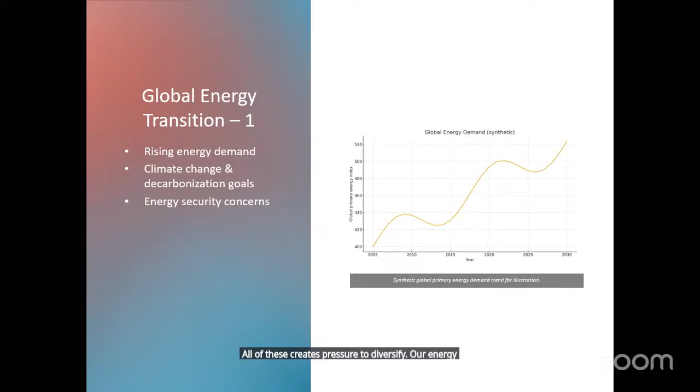Governments have set ambitious targets. Many countries have pledged to achieve net zero emissions by 2050 or later. But achieving those commitments requires not just deploying renewables, but also ensuring that they work reliably together in the energy mix. This is where bioenergy is special. It is renewable, but unlike solar or wind, it is dispatchable. That means it can provide energy whenever needed, making it a stabilizing force in the grid.

So in the global energy transition, looking ahead, we need an energy system that is resilient, sustainable, and flexible. And bioenergy contributes to that because it's renewable and storable. It can complement variable renewables like solar and wind.

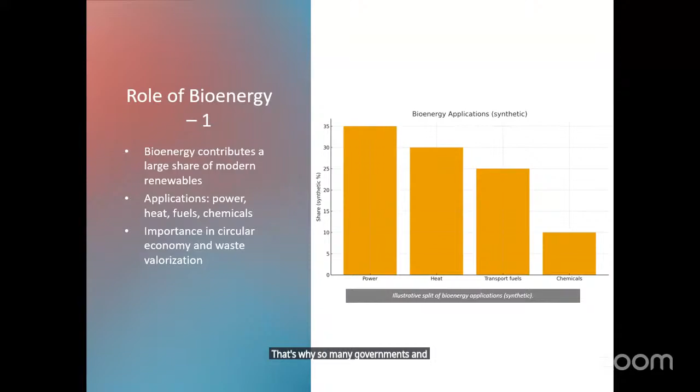And the role of bioenergy, looking to the future: bioenergy holds even greater potential, and sustainable biomass use can support rural economies by creating new markets for residues and byproducts. It can also enable decentralized energy systems, for example, small biogas plants that serve a community or a farm. This kind of distributed energy generation increases resilience, especially in areas not well connected to the grid.

But to unlock this potential, we need smarter ways of managing variability and uncertainty. This is exactly where digital twins come in, to help operations optimize and predict outcomes.

So why does virtualization matter? Why do you need virtualization for bioenergy? The answer lies in complexity. Biomass is not like coal or natural gas. It is highly variable. Its moisture content, composition, and energy density change depending on where it comes from and how it is stored, depending on geographical area and weather conditions. All these things affect the biomass.

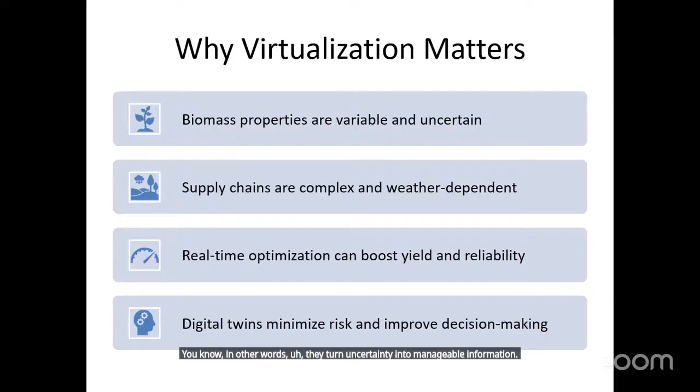So what is a digital twin? We start by defining what a digital twin actually is. At its core, a digital twin is a digital replica of a physical system. It's not just a static model, it is a dynamic system that continuously updates with data from the real world. Think of it this way: in the past, we built simulation models that could predict how a boiler or digester behaves under certain conditions. But those models quickly became outdated because they did not account for real-time changes. A digital twin solves that problem by integrating real-time data streams with simulation.

So in bioenergy, a digital twin of a biogas plant might continuously receive data about feedstock composition, digester temperature, or gas output. This allows operators to not only monitor but also predict future performance.

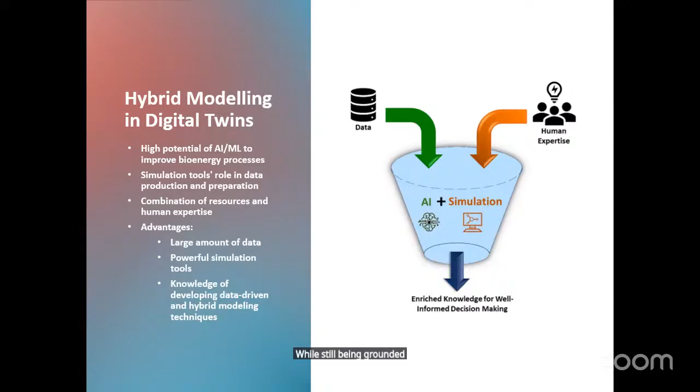So now, how do hybrid models support bioenergy systems? First, they can handle feedstock variability. Imagine receiving a batch of biomass with higher than expected moisture content. Physics models might predict the drying requirements, while machine learning models can forecast how that will affect energy yield. Secondly, hybrid models improve real-time optimization. By combining sensor data with simulations, they allow operators to make decisions that are both accurate and fast.

Finally, they enhance predictive control. That means not just reacting to issues, but anticipating them. Whether it is a risk of digester instability or a boiler efficiency drop, this predictive capability is what makes digital twins powerful tools for bioenergy plants or systems.

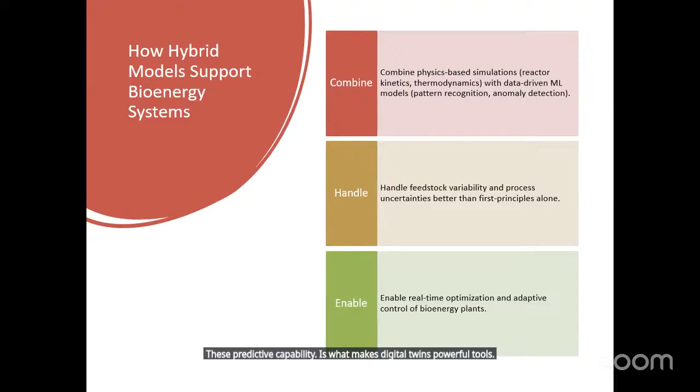So, the use of digital twins across industries. Digital twins are not a new idea. They have been applied in several industries with great success. In aerospace, for example, every modern jet engine has a digital twin that monitors its health and predicts maintenance needs. In healthcare also, digital twins are being developed for patients; using data from wearables, doctors can simulate and personalize treatment.

In manufacturing, factories use digital twins to optimize throughput and reduce downtime. The takeaway here is that the concept is proven; we are not reinventing the wheel, but rather adapting a powerful idea to the specific challenges of bioenergy.

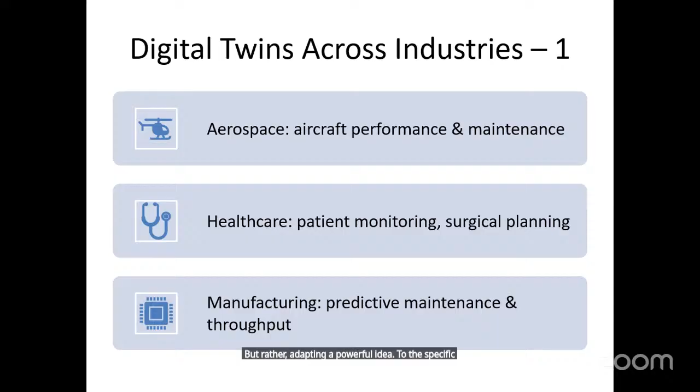So, digital twins across industries too. In this slide, in the energy sector, we already see digital twins being used in wind turbines and electrical grids. For example, wind farms use digital twins to predict turbine failures before they happen, reducing downtime. Utilities use them to simulate grid behavior under different loads. These applications show that digital twins are versatile and scalable.

If they can handle something as complex as a national power grid, then they can also be applied to bioenergy plants and supply chains. The lesson is that bioenergy can leverage existing experience while tailoring solutions to its unique challenges.

So, relevance to energy systems. Why are digital twins particularly relevant to energy systems? Because energy systems are dynamic and interconnected. You have fluctuating supply, variable demand, and a need for high reliability. Digital twins allow us to model that complexity and make smarter decisions.

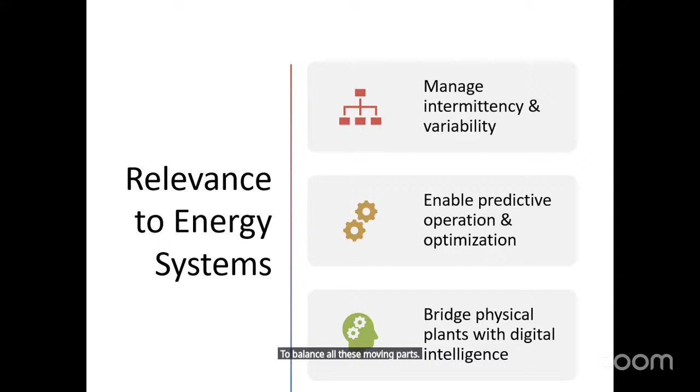For bioenergy, this relevance is even greater. Feedstock supply is variable, conversion processes are sensitive, and integration with the grid requires precise forecasting. Digital twins provide the predictive capability to balance all these moving parts. In short, they make bioenergy more competitive and more compatible with other renewables.

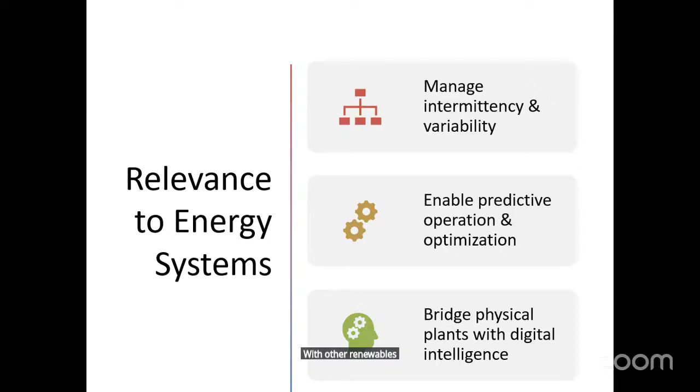So now we need to know about the different types of biomass feedstocks. Looking at bioenergy systems themselves, starting with feedstocks, agricultural residues are one of the most common sources. This includes rice husk, wheat straw, corn stover, and sugarcane bagasse. These residues are often underutilized, and in some regions they are burned in the open, causing air pollution. By diverting them into energy systems, we can turn a problem into a resource.

However, the challenge is variability. Moisture content can change depending on weather. Ash content varies with the soil type, and calorific value, which is an important parameter, differs by crop and harvest. This heterogeneity makes it difficult to design one-size-fits-all conversion systems. Again, this is why virtual models are so useful. They allow us to simulate different scenarios and adjust operation accordingly.

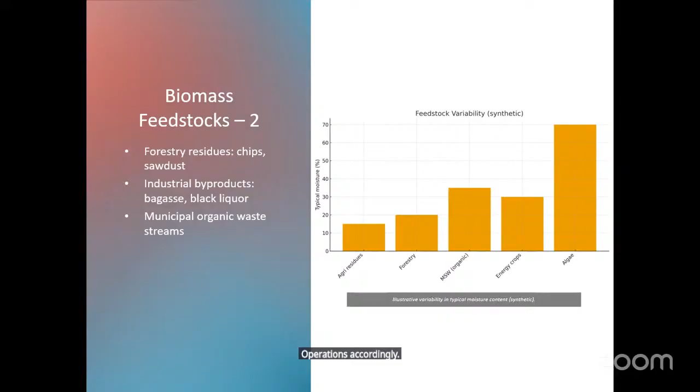The third biomass feedstock category includes emerging feedstocks like algae and aquatic biomass, which represent new frontiers. Algae, for example, grow rapidly, capture CO2 efficiently, and can be cultivated in non-arable land or wastewater, making them highly sustainable.

However, harvesting and processing algae is expensive and energy intensive. Similarly, other aquatic biomass sources show promise but come with logistical and technical hurdles. This emerging feedstock highlights why virtualization is so important.

We can use digital twins to simulate growth rates, harvesting schedules, and conversion efficiency before scaling up production. That reduces risk and accelerates the path from lab experiments to commercial viability. So whether we are talking about residues, byproducts, or algae, digital twins give us the flexibility to model diverse feedstocks and optimize how they are used.

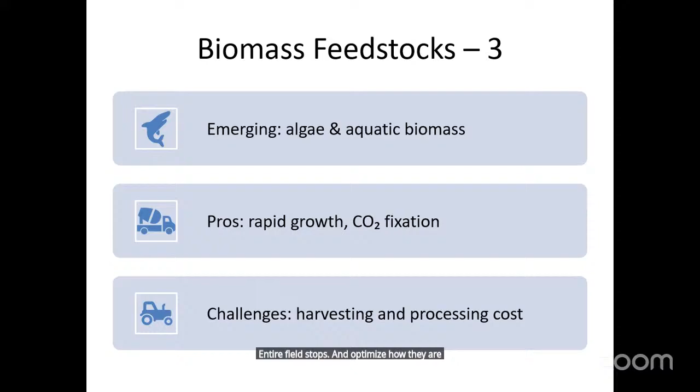Conversion pathway number one is thermochemical. Bioenergy conversion can be broadly divided into thermochemical and biochemical routes. Thermochemical pathways include processes like combustion, pyrolysis, and gasification. Combustion is the oldest and most straightforward, simply burning biomass for heat or power.

Pyrolysis, on the other hand, is a process where biomass is heated without oxygen, producing bio-oil, syngas, and char. Gasification uses a limited amount of oxygen or steam to convert biomass into syngas, which can then be used for power or fuels.

The advantage of thermochemical routes is their efficiency and scalability. You can build large plants that provide reliable outputs, but the downside is they often require high temperatures, significant infrastructure, and are sensitive to feedstock variability. This is where digital twins can really help by simulating these complex reactions and guiding operators in real time.

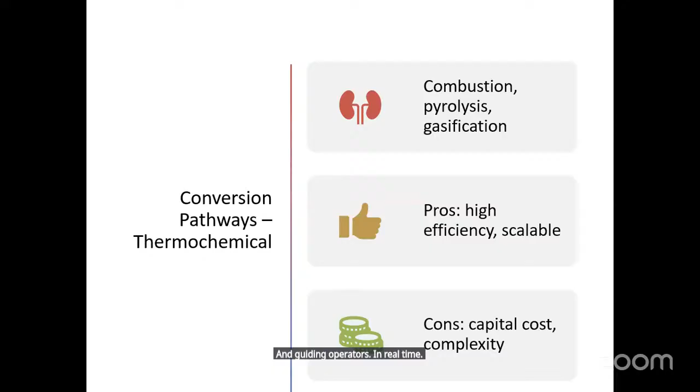Conversion pathway two is the biochemical process, the second major category. The most common methods here are anaerobic digestion and fermentation. Anaerobic digestion uses microorganisms to break down organic matter in the absence of oxygen, producing biogas, mainly methane and CO2.

Fermentation, meanwhile, is used to produce bioethanol from sugar and starch-rich crops. Biochemical processes are generally more environmentally friendly because they operate at lower temperatures and can use wet biomass without drying, but they are slower and more sensitive. For example, digester microbes can be easily stressed by changes in pH, temperature, or feedstock composition.

Here is where digital twins can be game changers. How? By monitoring microbial activity and simulating outcomes, they can help stabilize the process and improve yields.

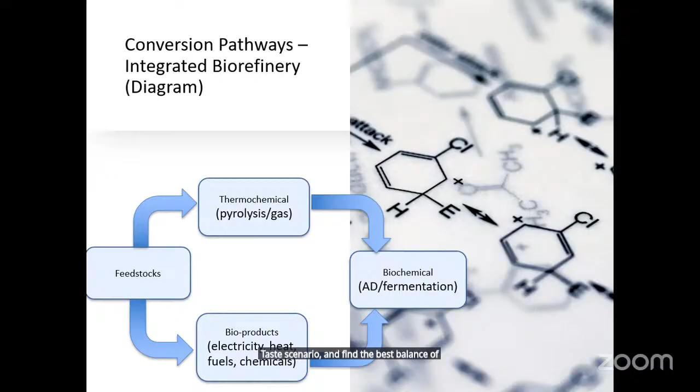What are the current challenges now? Despite the potential, bioenergy faces several challenges. First is feedstock variability: no two batches of biomass are exactly the same.

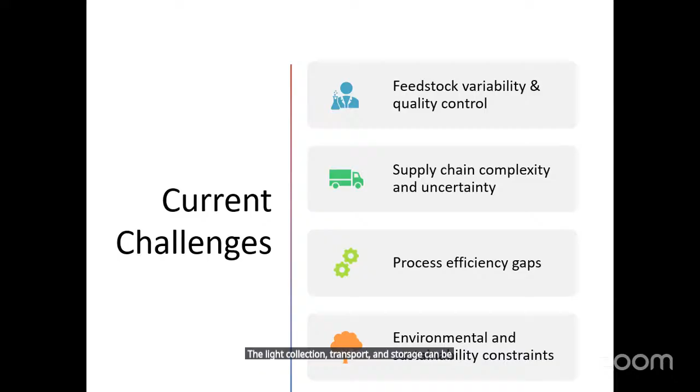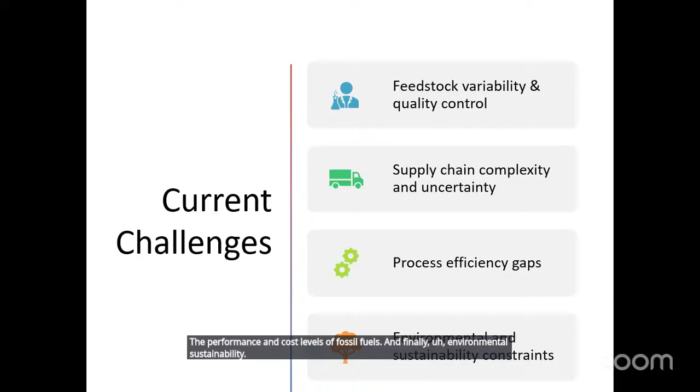Second is supply chain complexity, like collection, transport, and storage, which can be expensive and logistically difficult. Third is process efficiency; many technologies still struggle to reach the performance and cost levels of fossil fuels. And finally, environmental sustainability, not all biomass is automatically green. We need to ensure that land use, biodiversity, and carbon footprints are properly considered.

These challenges highlight why virtualization is not just a nice to have, but a necessity. It allows us to manage uncertainty, improve efficiency, and make bioenergy more sustainable.

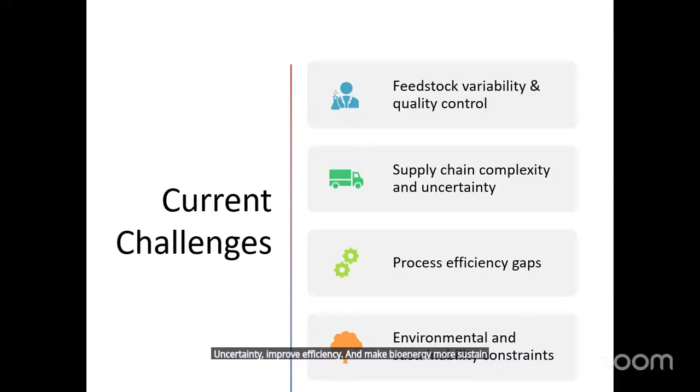So, why virtualizing biomass? First, monitoring biomass properties like moisture or ash content will fluctuate. Virtual models help us track those changes in real time.

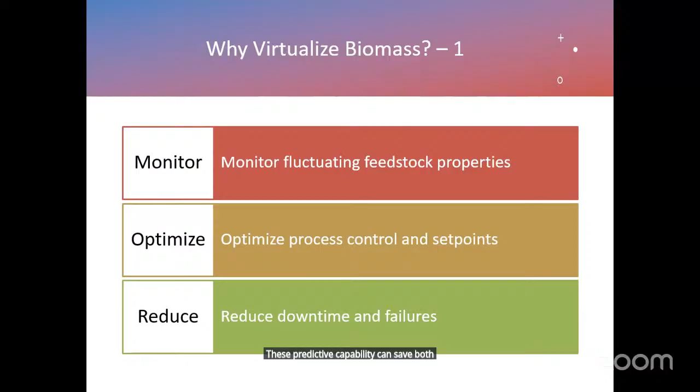Second, optimization. By simulating different operational strategies, we can identify the best set points for reactors or digesters, leading to higher efficiency. Third is reliability. Digital twins allow us to anticipate problems before they cause downtime. This predictive capability can save both time and money in industrial operations.

And now, why virtualizing the biomass? Another reason to virtualize is integration with the larger energy system. Bioenergy does not operate in isolation. It needs to interact with the grid, with markets, and with other renewables.

Digital twins make that integration possible. For instance, they can forecast how much energy a plant will produce tomorrow based on expected feedstock deliveries and current conditions. That forecast can then inform grid operators or market bids. So virtualization helps bioenergy move from being a stand-alone plant to being an active player in a smart, interconnected energy network.

So we need to know about digital twin architecture and how it works. You can see the architecture of the digital twin in bioenergy. On the left side, we have the physical asset, which may be reactors, boilers, digesters, and even the supply chain. These are equipped with sensors that capture data like temperature, gas flow, or feedstock moisture, and that data flows into an acquisition system, often through SCADA or IoT platforms.

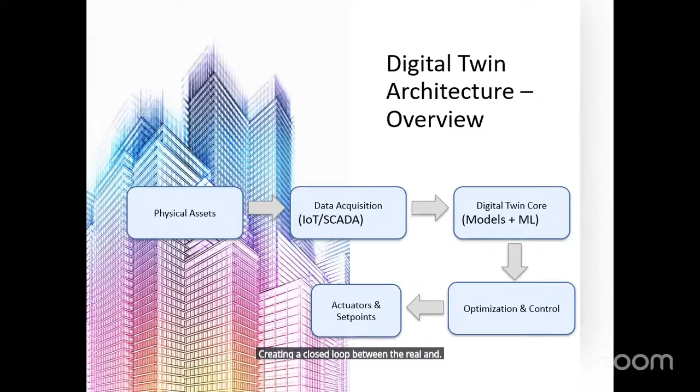In digital twin architecture, the data loop is the heart of the digital twin. The physical system sends data to the twin. Then the twin runs simulations and predictions, and sends recommendations back to the physical system. What makes this powerful is that it is not one way.

The twin continuously recalibrates itself based on new data, which keeps the model accurate over time. That's a big difference from traditional simulation, which often drifts away from reality as conditions change. This means a biogas plant can continuously learn and improve its operation as more data is collected. It's like having a living, learning model running alongside the plant.

In the case of digital twin architecture for people and process, we should also remember that digital twins are not just about technology. They are also about people and process. Operators need user-friendly dashboards to interpret insights. Maintenance teams need workflows that incorporate predictions from the digital twin. And management needs governance structures to ensure cyber security and data integrity.

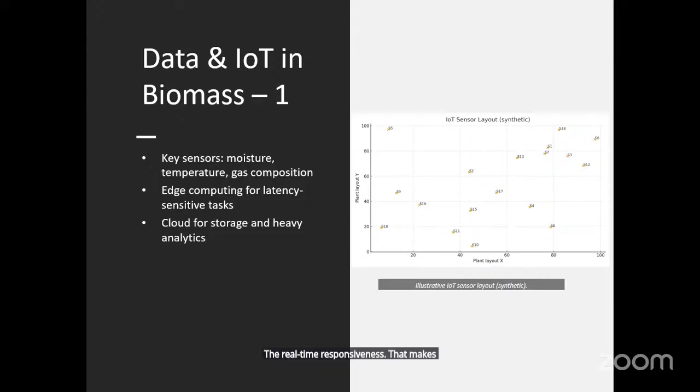Now, data and IoT in biomass - but just utilizing sensors is not enough. We also need to think about interoperability and data quality. If one sensor speaks a proprietary protocol and another uses an open standard, they might not talk to each other easily. That's why standardization is crucial.

Data also has to be validated and clean. Biomass systems often operate in dusty, wet, or corrosive environments, which can affect sensor reliability. If bad data enters the twin, the prediction will be wrong.

Finally, we must address cyber security. As plants become more connected, they also become more vulnerable to cyber attacks. So protecting data streams is essential, not just for plant safety, but for broader energy security.

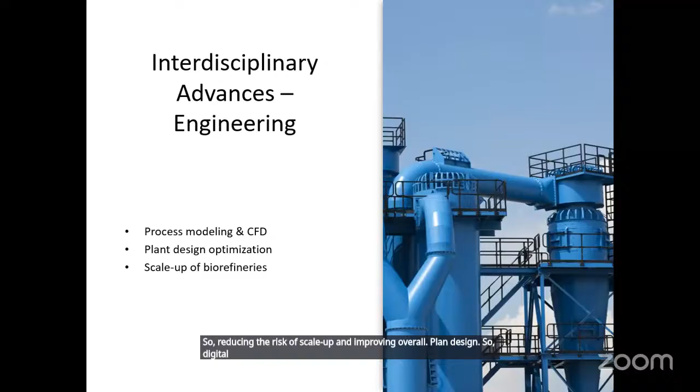Scaling up is another challenge. Designing a lab system is one thing, but making it work at industrial scale is much harder. So a digital twin acts as a bridge between lab results and industry reality, reducing the risk of scale-up and improving overall plant design. That's how a digital twin acts.

In the case of computer science, it contributes through artificial intelligence, machine learning, and IoT integration. These fields provide the algorithms and infrastructure that allow digital twins to process and learn from data. For instance, machine learning can predict reactor performance or detect anomalies before they become serious. IoT platforms handle the massive flow of sensor data, and data engineers ensure everything is stored, processed, and visualized properly. The challenge is making sure these systems are reliable, scalable, and secure. Bioenergy plants can generate gigabytes of data every day, and without robust computer science tools, it would be impossible to turn that data into actionable insights.

In the case of environmental science, that brings another critical perspective. We can't just optimize bioenergy for efficiency; we also need to ensure it is sustainable. Life cycle assessment, or LCA, allows us to evaluate environmental impacts across the whole value chain. Digital twins can integrate this LCA data in real time. For example, they can estimate the carbon footprint of producing a batch of biogas, considering both feedstock sourcing and conversion. This allows operators to make environmentally conscious decisions while still optimizing for performance.

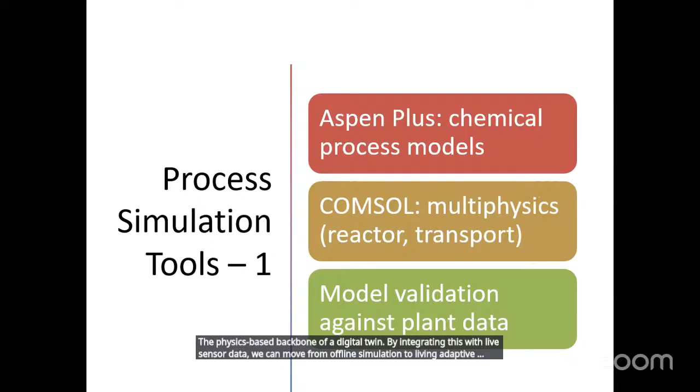Other process simulation tools include MATLAB or Simulink, which is excellent for control system design, and HOMER, which is widely used for simulating renewable energy systems and microgrids. These tools let us explore how bioenergy integrates with other renewables at the system level. Co-simulation is becoming increasingly important—that means linking different simulation environments together, for example coupling a biochemical process model in Aspen Plus with an energy system model in HOMER. This gives us a holistic view of both plant-level process and system-level interaction. Digital twins build on this by adding the real-time layer, making sure the models stay relevant and accurate as conditions change.

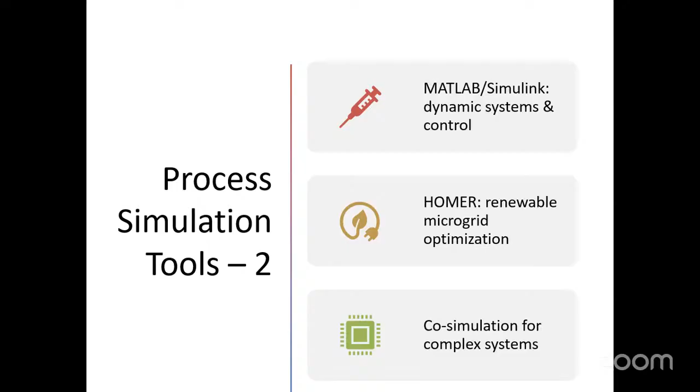Now, AI and ML approaches in bioenergy systems. Artificial intelligence and machine learning are the heart of modern digital twins. These techniques allow us to extract patterns and make predictions from massive amounts of data. For instance, neural networks can predict how a digester will respond to a new feedstock mix, or forecast biogas yield based on past performance. Anomaly detection algorithms can identify unusual behavior, like a sudden drop in methane output, before operators even notice.

Reinforcement learning goes one step further—it does not just predict, it learns strategies by trial and error. For example, it can continuously adjust feeding rates in a digester to maximize gas yield while avoiding instability. The beauty of artificial intelligence is that it adapts as more data is collected. Over time, the model becomes smarter, just like an experienced operator who learns from years of practice, but at a much faster pace.

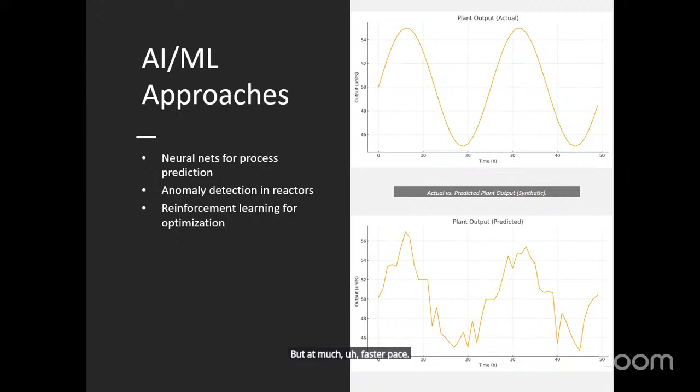So on to hybrid models. As powerful as AI is, it also has limitations. Purely data-driven models can be black boxes. They may predict outcomes, but they don't always explain why those outcomes occurred. That's where hybrid models come in.

So a hybrid model combines physics-based simulation with machine learning. The physics ensures that the model remains grounded in scientific principles, while the artificial intelligence adds adaptability and responsiveness. So in bioenergy, this is especially important.

For example, a gasification model based only on physics equations might not capture subtle variations in biomass feedstock. But a machine learning model trained on historical plant data can. So together they produce a model that is both accurate and interpretable. So in practice, hybrid models provide the reliability of engineering with the flexibility of AI, a best of both worlds approach.

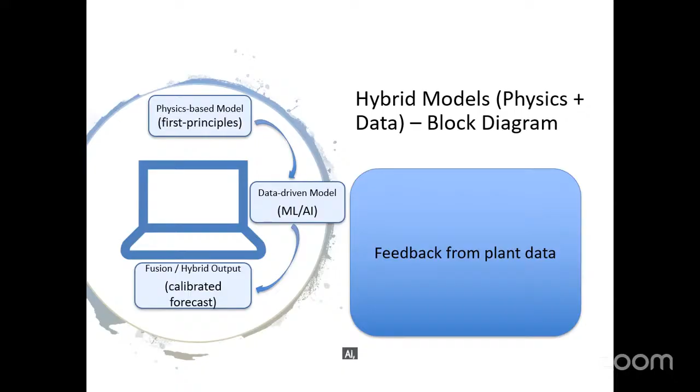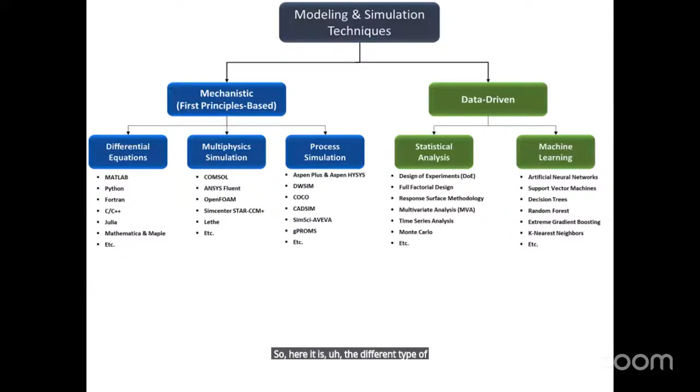So here are the different types of first principle methods and data-driven approaches. In first principle methods, you can see you can use differential equations, multi-physics simulation, process simulation, then statistical analysis. In machine learning,

so this slide categorizes the modeling and simulation techniques that support digital twins in bioenergy. On the left side, we have mechanistic or first principle approaches. This includes differential equations, multi-physics simulation, and process simulation. Differential equations are the foundation. They describe how mass, energy, and momentum change over time. Tools like MATLAB, Python, or even Fortran have been used for decades to solve these equations.

Then we have multiphysics simulation. This captures more complex interactions such as fluid flow, heat transfer, and chemical reactions happening at the same time. COMSOL, ANSYS Fluent, and OpenFOAM are common platforms here. These are especially important for detailed reactor modeling.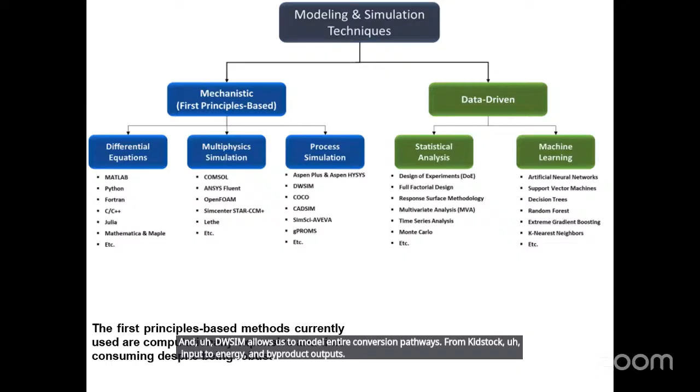So process simulation packages such as Aspen Plus, Aspen HYSYS, and DWSIM allow us to model entire conversion pathways from feedstock input to energy and byproduct outputs. They provide the big picture of plant level operation.

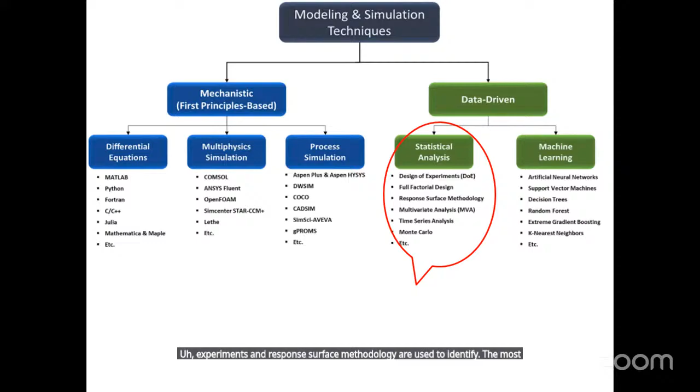On the right side, we have the data-driven approach. Statistical methods such as design of experiments and response surface methodology are used to identify the most influential factors and optimize conditions. Time series analysis and Monte Carlo simulation also fall in this category.

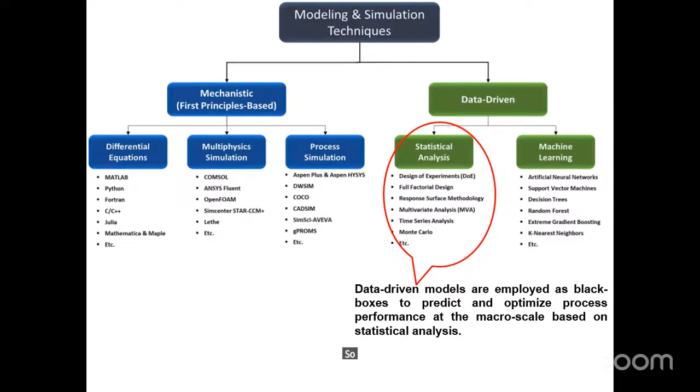So finally, machine learning adds another layer of capability. Techniques like neural networks, support vector machines, decision trees, and random forests can find patterns in large amounts of data. These methods excel at handling noisy, variable feedstock data and predicting plant performance in real time.

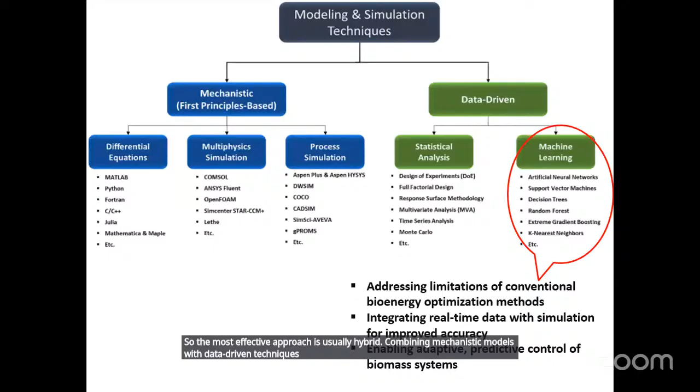So we can say together these techniques form the toolbox of digital twins. So the most effective approach is usually hybrid, combining mechanistic models with data-driven techniques, giving us both scientific grounding and adaptive learning.

So here are the limitations of first principle models in bioenergy. It's worth highlighting why digital twins are such a step forward. Traditional first principle models, those based purely on physics and chemistry, have important limitations in bioenergy. First, they are expensive and time-consuming to build, especially for complex multi-step processes like digestion or pyrolysis.

Second, they often require many iterations and sensitivity analyses to account for variability. Third, they are not always designed for optimization. Most were developed as offline engineering tools.

And finally, biomass conversion processes are highly nonlinear. So a small change in moisture or pH can have large or unpredictable effects. These non-linearities are difficult to capture with equations alone. So that's why integrating machine learning and real-time data is essential. It overcomes the rigidity of purely theoretical models.

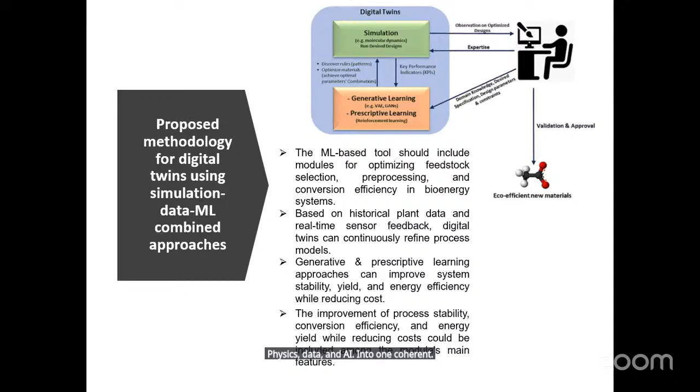So how do we move beyond these limitations? So one way is through a combined optimization methodology that combines machine learning with simulation. So in bioenergy, this could mean using process simulation as the backbone, while machine learning models handle variability in feedstock properties. An optimization algorithm then searches for the best operating strategies.

So for example, we can simulate a gasifier with a different feedstock, use machine learning to refine predictions, and then run an optimization algorithm to maximize efficiency while minimizing emissions and cost. So the result is a powerful toolkit that helps both researchers and industry operators design better plants and run them more efficiently. This is the essence of digital twin methodology for bioenergy.

So let us put this in context with the case studies. A virtual biogas plant. So imagine we have a digester treating agricultural residue. Normally, operators rely on rules of thumb or basic monitoring, checking pH, gas yield, or temperature. But with a digital twin, we have a live replica of the plant running in parallel.

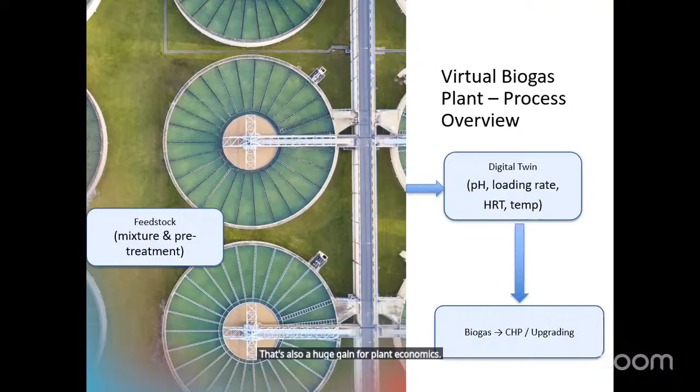So in the case of optimization, the optimization is where digital twins really shine. By continuously analyzing feedstock quality and process parameters, the twin can recommend the ideal operating strategy. For example, it might suggest mixing feedstocks with different carbon to nitrogen ratios to maintain microbial balance. Or it might adjust hydraulic retention time to maximize methane output.

What's powerful here is the prediction. Instead of waiting for problems like pH crashes to occur, the twin operates in advance. So this proactive management transforms how biogas plants are run, from reactive to predictive operation.

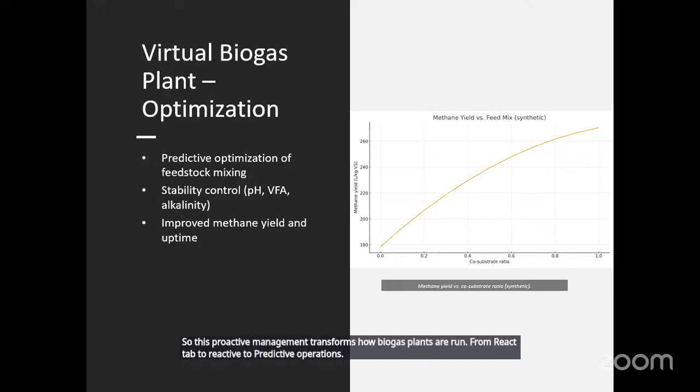Then biomass supply chain optimization. In this case, digital twins are not limited to the plant. They can also apply to the entire biomass supply chain: collection, transport, storage. All of these add cost and uncertainty. So a supply chain twin can simulate different collection routes, evaluate storage options, and even factor in weather impacts. For example, if heavy rains are expected, the twin can recommend an alternative storage strategy to prevent feedstock spoilage.

So by doing this, operators can cut cost, reduce waste, and ensure a more reliable feedstock supply. So considering that logistics can represent up to 50% of total bioenergy cost, optimizing the supply chain is just as important as optimizing the conversion process.

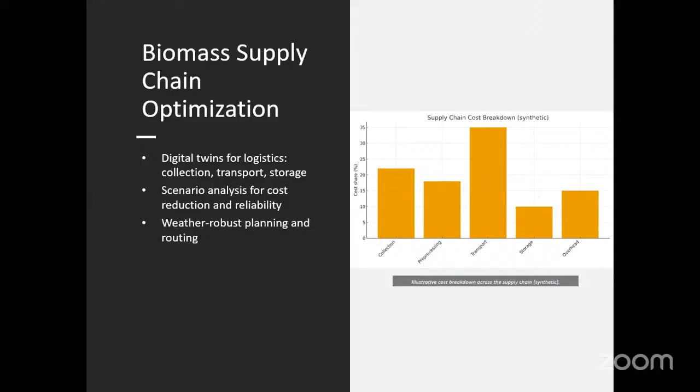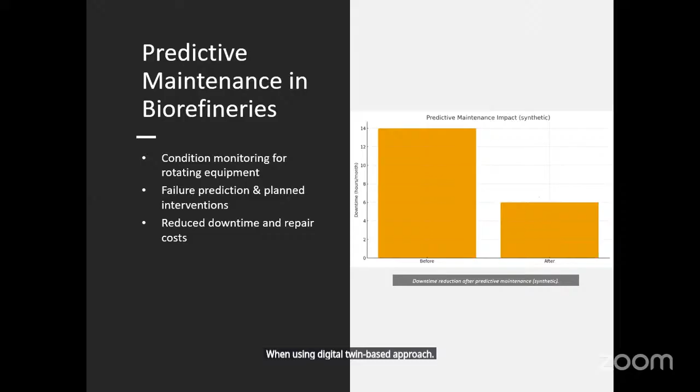So what are the benefits of this virtualization? Before we dive into the challenges, it's important to pause and highlight the benefits of virtualization in bioenergy systems. So first, we can say efficiency. By continuously optimizing operation, digital twins can increase energy yield. For example, improving methane production in biogas plants or maximizing syngas quality in gasifiers.

Second is sustainability. With better process control, emissions can be reduced, waste minimized, and environmental impacts tracked in real time. This allows operators to meet both economic and environmental goals. And the third one is cost reduction. Predictive maintenance avoids unplanned downtime, while supply chain optimization reduces feedstock cost. These savings directly improve plant profitability.

Finally, decision support: digital twins don't just provide raw data, they deliver actionable insights. They can help plant operators, engineers, and policymakers make better, faster decisions.

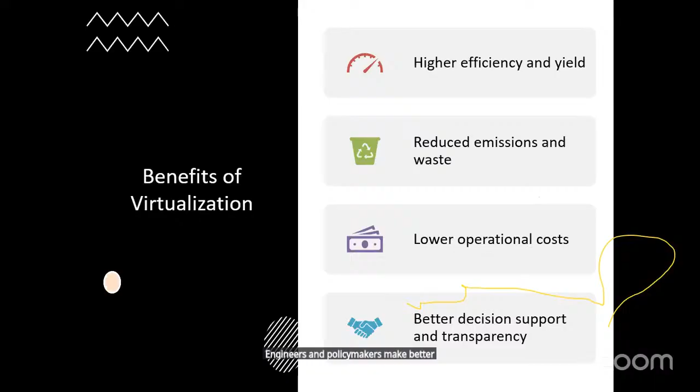So now the challenges and limitations. While digital twins offer enormous promise, we also need to be realistic about the challenges. The first major issue is data. Bioenergy plants often don't have consistent or high quality data streams. Sensors can fail, readings can drift, and sometimes key variables are not measured at all. So without reliable data, the twin can't function properly.

Okay, another challenge is computational demand. High fidelity simulation, especially when combined with real-time learning, can require significant processing power. Smaller operators may find the infrastructure cost daunting. And integration with legacy systems is also tricky. Many bioenergy plants were built years ago with older control systems that don't easily connect to modern IoT platforms. So retrofitting them requires both money and technical expertise.

So these are the challenges, and other challenges are there. Beyond the technical side, there are also policy and human challenges. Regulations are not yet adapted to digital twin technologies. For instance, who is responsible if an automated twin makes a faulty recommendation? There are also skill gaps. Successful deployment requires knowledge in engineering, data science, computer science, and environmental assessment. Few organizations have all these skills in house.

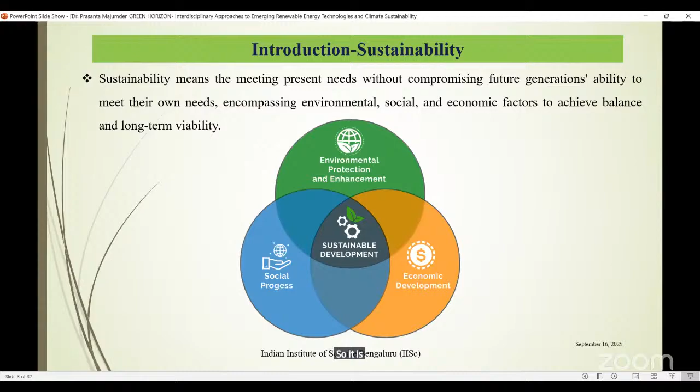And social progress means we have to develop a system or produce any material so that it can be accessible to everyone, and the cost of the product also will be accessible to everyone. Like, fossil fuel prices are rising day by day, so it is hampering mainly the middle class, lower middle class, and lower class people.

So if we can generate alternative energy sources whose cost is minimal, it will be accessible to lower income people and also the middle class people. And this is the social impact of sustainability.

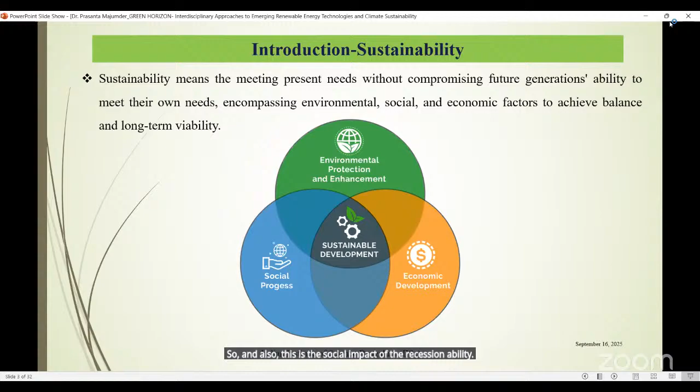Then the United Nations also adopted a total of 17 goals, that is, the sustainable development goals. It is Ambition 2030; the target is 2030. Within 2030, the United Nations set a target to accomplish all these parameters in various disciplines, various sectors, and various service or manufacturing sectors or any sector. So there are a total of 17 goals.

As the theme of this faculty development program is energy and climate based, and my topic is solar energy based, that will come under goal 7, SDG 7, that is affordable and clean energy, access to affordable clean energy for everyone. And climate action comes under goal number 13, SDG 13. So our focus for this particular session is SDG 7, that is the access to affordable clean energy and cheap energy for everyone.

And what is Sustainable Development Goal 7? It means ensure access to affordable, reliable, sustainable and modern energy for all. For example, solar can be easily accessible in most places around the world, except some locations. And it is also affordable. It is almost zero cost, except the investment cost for fabricating the system, and the running cost is almost zero. Only the operational and maintenance cost is there.

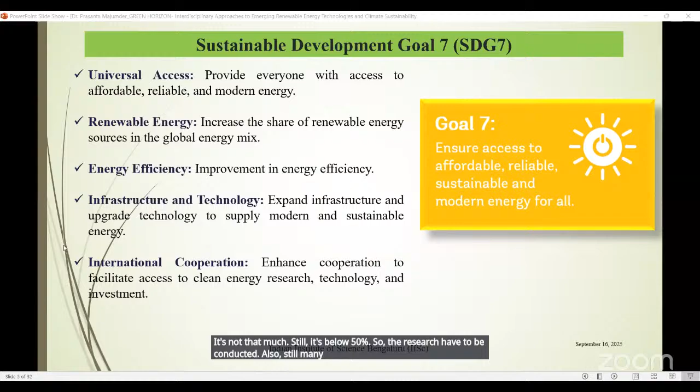And energy efficiency is another important factor, because at present the energy efficiency of the solar system is not that much. It's still below 50%. So research has to be conducted. Many people are still doing research, and the stakeholders are concerned about how to improve the energy efficiency of solar systems and other renewable energy sources.

And infrastructure and technology. In a fossil fuel system, like a coal-based or gas-based thermal power plant, electricity is produced continuously, and a grid transmission system is there with the power station. But solar thermal or solar photovoltaic-based electricity generation systems are mostly standalone or independent systems. And wind power generation systems are also mostly standalone systems nowadays.

We have to look at how to make it possible to connect renewable energy with the grid power system, so that when solar or wind energy is available more than needed, we can supply this through the central grid system. This way, production from solar or wind energy systems will be beneficial with less loss, because otherwise, in the daytime when solar energy is sufficient and we produce a huge amount of electricity but our need is less, the remaining will be lost if it is not connected to the grid electricity system. So that has to be considered.

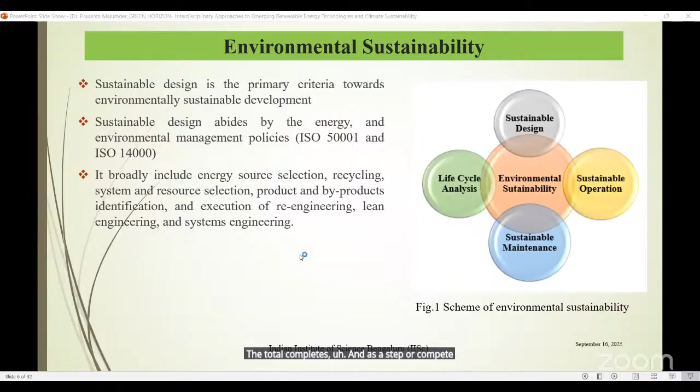In the renewable energy system, it is said that the energy utilization ratio is more important than energy efficiency, because how much energy we can utilize through circular economy, waste energy circular utilization, or waste recovery system is more important. System engineering means the incorporation of multiple aspects, combining multidisciplinary systems for improving the total, complete energy system or production system - that comes under system engineering.

Then, energy transition and sustainability. India's energy mix is set to undergo a transition from fossil fuel to renewable energy, with 50% cumulative installed capacity by 2030. This means the Government of India's vision is in compliance with the Sustainable Development Goals of the UN.

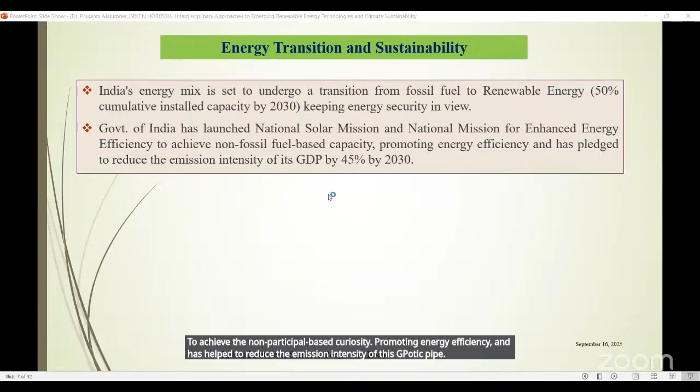The Government of India has also launched the National Solar Mission and the National Mission for Enhanced Energy Efficiency to achieve non-fossil fuel based capacity, promoting energy efficiency, and has pledged to reduce the emission intensity of GDP by 45% by 2030. So this is the Government of India's initiative.

There is a reliability concern with renewable energy systems. Unlike conventional energy sources like coal and nuclear, renewable energy cannot be stockpiled, and generation from these sources cannot be controlled. Coal we can store for a long term, but solar energy we cannot store. However, every day the sun rises, and every day we can get it.

We cannot stock it because there is a limitation in the storage of thermal energy systems. At present the most common thermal energy storage systems, like sensible storage such as rock, and also PCM based latent storage like wax or bricks, cannot store heat energy for a long time.

In the daytime, when solar is available, in the heat exchanger we can store the thermal energy into wax, rock, sand, or water, and that thermal energy we can use at night time only. But we cannot store it for 3-4 days or a week. That limitation is there. Coal, we can store for a long time.

Also, the generation from these sources cannot be controlled. We cannot control the generation because sun radiation we cannot control. It is out of our hands.

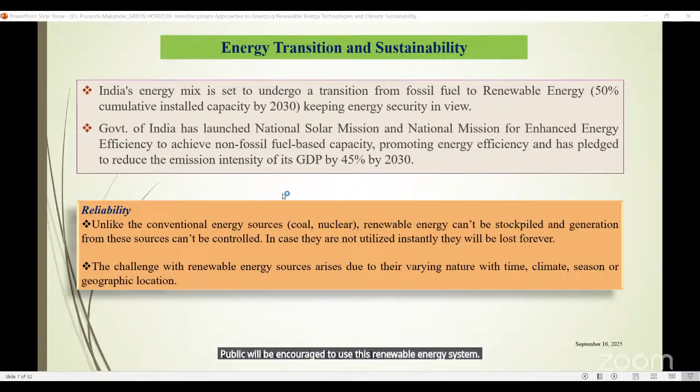The need for energy storage systems arises from the intermittent nature of renewable energy sources, notably solar, wind, or run-of-the-river hydropower projects. In a large hydropower project, there is a water reservoir, so we can control the flow of water by closing and opening the reservoir gate. But in run-of-the-river, like pico hydropower projects, the water turbine is generally fitted across the water flowing in the river, so we cannot close and open it as per our choice. In that case, energy storage is required.

The incorporation of significant amounts of variable, intermittent energy into the energy mix presents a challenge for maintaining grid stability and uninterrupted power supply. Current renewable energy technologies cannot balance power market demand through immense inventory storage, because various sectors like health, food and agriculture, and service sectors require 24/7 power supply, and continuous grid stability and uninterrupted power supply is required. So to maintain that, an energy storage system is required.

Also, the gap between energy demand during peak time and supply can be caused by the difference in energy availability time and consumption. During peak time, cost also rises. So we have to consider all these things, and the energy storage system should be developed so that the renewable energy system can be made reliable.

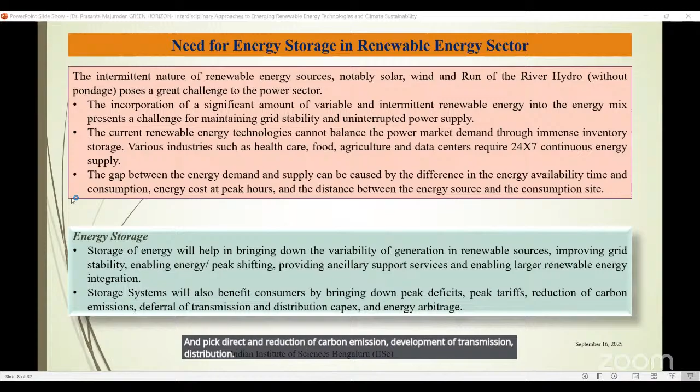Waste energy recovery is another aspect, because in many thermal systems, heat loss is a very challenging aspect. From any fluid system, the exhaust fluid, any flue gas coming out from the exit of the system, or any fluid like water coming out from the system has higher thermal energy. Also the heat loss by conduction and convection through the system boundary towards the surrounding is a serious concern.

So we have to restrict this heat loss, and that can be possible by circular economy and also recirculation of the system. Waste heat utilization can improve the gross efficiency as much as 20%, because due to this waste heat, the thermal efficiency of the system is less. So if we can restrict this heat loss, we can improve the efficiency of the system as much as 20%.

While designing any heat recovery system, one should consider the quantity and quality, the operating schedule, composition, phase, accessibility, and transportability of the waste stream, and the metallurgical properties of the heat exchanger material. That means, for selecting the material or the waste heat recovery system, whether it will be sensible heat storage material, latent heat storage material, or thermochemical storage material, first we have to know how much exhaust heat is available on average.

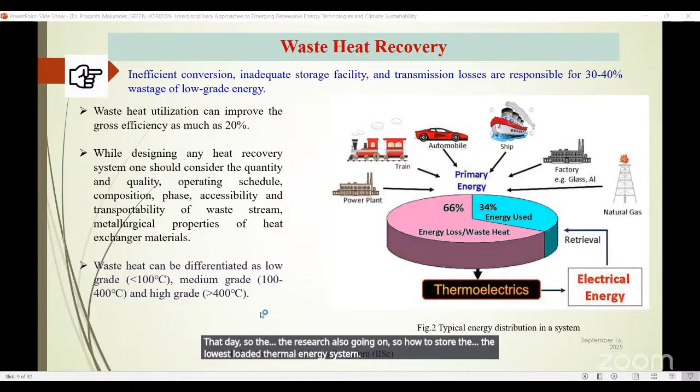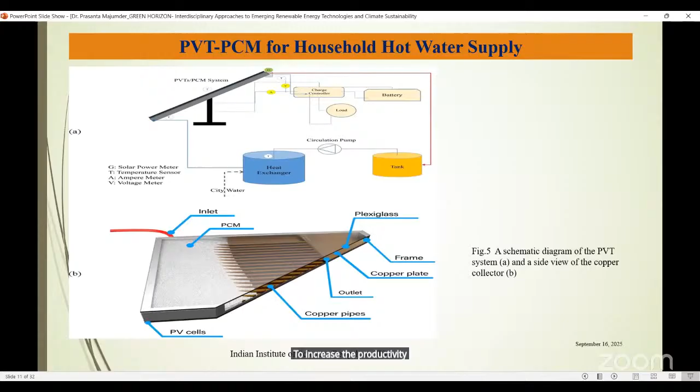Now, a case study on the designing of a sustainable solar energy system. In the solar energy system, there are two aspects. One is solar thermal, and the other is solar photovoltaic. So in the case study, I'll show how the solar energy system can be designed for sustainable use. Because, as I already told, in the solar energy system one main issue is the sustainability, the reliability of the system due to uncertain solar energy sources.

This drying system was basically developed for drying the locally harvested agro-horticultural produce, because it has huge global market potential. And also in the village area, people generally dry the product in the open sun, by spreading the material on the road or any open ground.

But due to uncertain weather and uncertain solar energy, and also intermixing of various debris and insects, it is a very unhealthy process. And it takes a prolonged duration to dry the product. So for sustainable drying operation, we have to design this sustainable drying system.

Conventionally, electrical energy-based dryers are available in the market, but nowadays the electricity tariff is very high, so it is not affordable for the poor farmer to use an electricity-based dryer for drying their product and making it available in the market. So in order to eradicate these difficulties, we have to design a solar-based dryer in a sustainable way so that people can rely on that drying system at minimal cost.

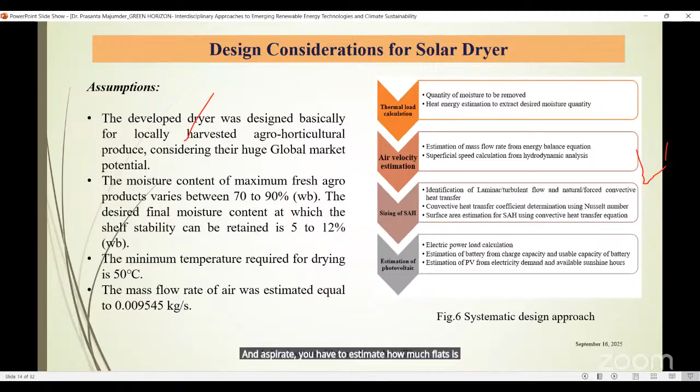And mass flow rate: we have to estimate how much mass flux is required to supply for a particular drying operation. Then the quantity of moisture to be removed by the drying process is given by this formula, Mv = Mi × (MCi − MCf) / (100 − MCf). Mi means the initial mass of the raw fresh product to be dried, that is, the inventory size. And moisture content initial, MCi, and final, MCf.

That is the initial moisture content, that is the moisture content of the fresh product, and the moisture content of the final product. So from equation number 1, you can find out how much quantity of moisture is to be removed in this proposed drying process. Then in equation number 2, you can calculate how much moisture content is present in the product, where MW and MD are the mass of water and the mass of dry matter in the product.

Then the amount of heat energy to be supplied during the drying process to evaporate the required amount of moisture from the product. In equation 1, we calculated the amount of moisture to be removed. Now, how much heat energy is to be supplied to remove that quantity of moisture from the product? That is QE from equation number 3, MV LFG. MV is the quantity of moisture to be removed from the product, and LFG is the latent heat of evaporation of the moisture.

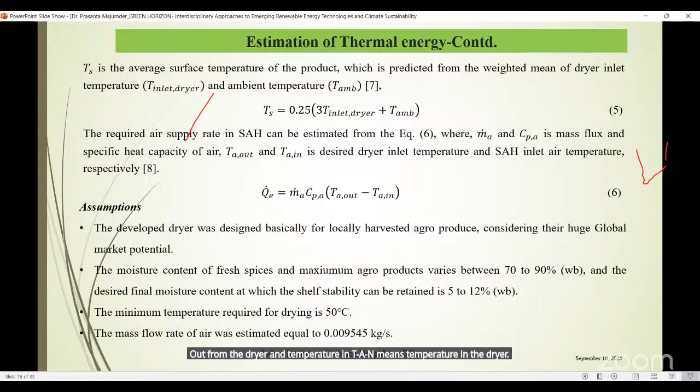And these are the assumed and estimated parameters for calculation of this process. Maximum moisture content is assumed as 90%, and desired final moisture content is 9%. That is, for the fresh product we are assuming the moisture content is 90%, the final product is 9%, and the inventory size is 2 kg. Then the moisture extraction quantity from equation number 1 we can calculate as 1.78 kg. Ambient temperature in the locality where the dryer is placed is measured as 25 degrees C.

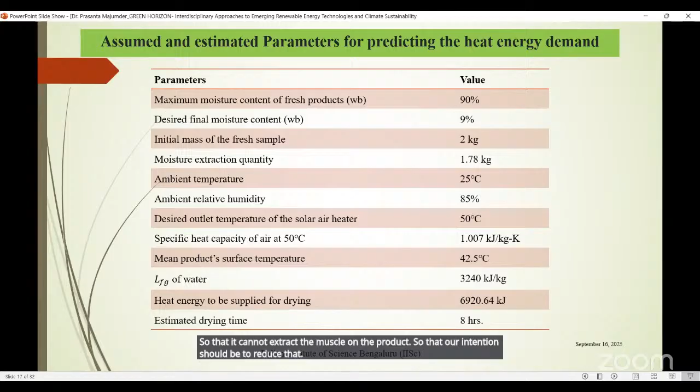Ambient relative humidity is 85%, because relative humidity is another important parameter in the drying process, since the air has to remove the moisture from the product. If the air relative humidity is higher, it cannot extract the moisture from the product. So our intention should be to reduce the air relative humidity as much as possible by other means, like a dehumidification process. The mean product surface temperature is calculated by the equation, the latent heat of evaporation of water is established, the heat energy to be supplied for drying was calculated, and the drying time could be estimated for the pre-experimental process.

Then the hydrodynamics of the fluidization system, because air is passing, that is the fluid, so we have to consider the hydrodynamic phenomena, and the required velocity of air in the fluidized bed column was estimated on the basis of minimum fluidization velocity. That means how much the velocity of the air should be at which the product would behave like a fluid. That minimum fluidization velocity can be determined by the Kunii and Levenspiel correlation using equation number 7.

That depends upon various parameters of the product and also the drying air, where epsilon mf is the void fraction or bed voidage, that means the bed voidage between the product and the air in the drying chamber. Psi s and dpm are the sphericity and the mean particle size of the product, and rho and mu are the density and viscosity of the fluidizing air.

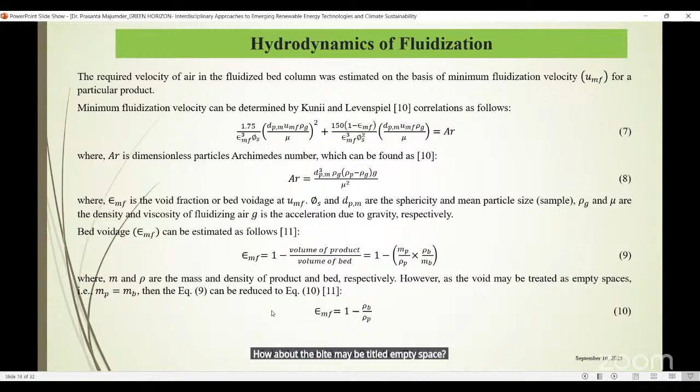m and rho are the mass and density of the product and the bed. However, the void may be treated as empty space. The density of the bed can be calculated by using the mass mp by vb. That is, vb is the volume of the bed. We can calculate this by using the dimension of the bed. Also, dfc and sb are the diameter of the fluidization column and the height. From the diameter and height, that means from the dimension of the column, we can calculate the volume of the bed.

Then for non-spherical samples, the shape may be quantified by the term sphericity. That means the surface area of a sphere of the same volume divided by the actual surface area of the product sample. So the mean particle size of the non-spherical particle can be calculated by using equation 13. In reality, not all the products are in spherical form. So for that product, we have to calculate the sphericity of the non-spherical particle by using equation 13.

And the minimum fluidization velocity was estimated to be 0.02 meter per second. That means this is the minimum flow rate of air we should maintain so that the product will fluidize and drying can be started. But this is only the minimum velocity. For the effective drying operation, a superficial flow rate is required, and that is calculated as 1.13 meter per second.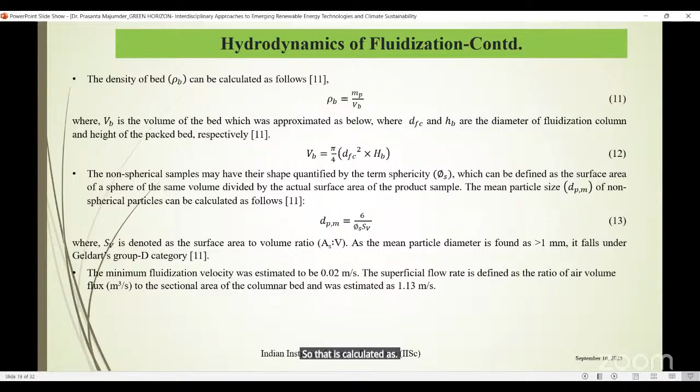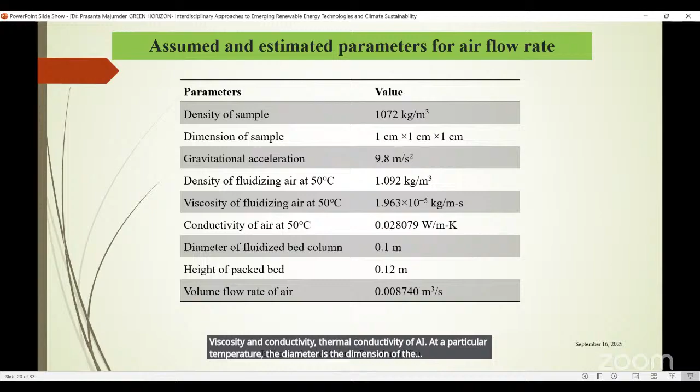Now, sizing of the solar air collector, so that it can produce the required heating effect. First of all, we have to estimate the hydraulic diameter from equation 14. The required air velocity in the solar air collector can be estimated from the superficial velocity. We have to multiply by a factor of safety because there will be some losses, heat loss by conduction and convection from the side wall, which we cannot control.

And then the Reynolds number was calculated to check the nature of airflow in the solar air collector, because in a thermal fluid system we have to consider whether the airflow is laminar or turbulent. So by estimating the Reynolds number, we can find out whether it is laminar or turbulent flow. It was found that the airflow was laminar in nature.

And also we have to determine whether the heat transfer is a natural convection or forced convection system. You have to determine this by using the Grashof number and Reynolds number correlation. If it is less than 0.1, it is forced convection, and if it is greater than 10, it will be natural convection.

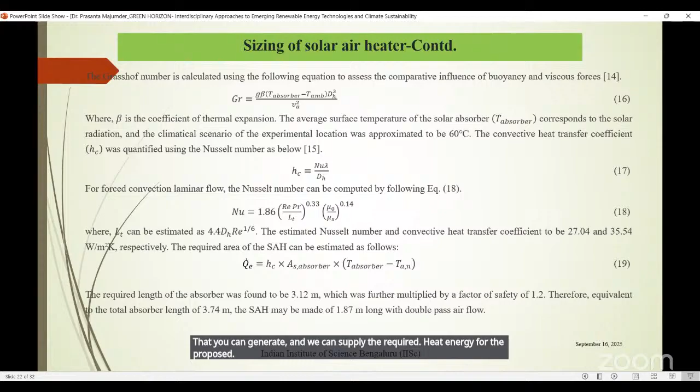Then estimation for battery and photovoltaic module: we have to estimate how much capacity of battery and photovoltaic system is required for operating the suction fan and blower. Also, the total power consumption by the pump per day is the total power rating into running time. How much time per day it will run, on that it depends. And power rating is the standard of that particular pump. Energy input to the converter system can be estimated by equation number 21, that is the conversion of energy.

The usable capacity of the battery, among the total capacity, how much is usable, is the rated capacity into depth of discharge. It can be estimated from equation number 22. And the required charge capacity of the battery depends upon the voltage of the pump, that is the suction pump, and the converter. And the desired number of batteries can be estimated from equation number 24.

Then energy input into the battery can be computed from equation number 25, that is E of battery from E of converter by efficiency of the battery and the conversion efficiency. The energy input to the charge controller, generated by the photovoltaic panel, can be determined from equation 26, which depends upon the charge controller efficiency and the energy input to the battery. The total charge capacity of the photovoltaic panel is found by equation 27, and the total electricity to be generated by the designed photovoltaic module is estimated from equation number 28.

And for generating this total electricity, how many photovoltaic modules of that particular charge capacity or efficiency are needed can be estimated using equation number 29. So for the proposed system, based on the proposed electricity requirement, the number of photovoltaic panels of the particular rating and efficiency was estimated by equation number 29. It was 1.6, which is rounded to 2. That is, 2 photovoltaic panels are required, and it was assumed that the system will run for 6 hours per day.

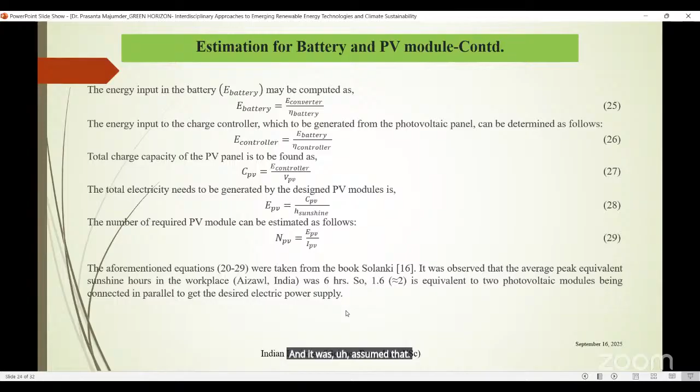Not only this drying system; suppose we are planning to install a photovoltaic system for power generation on our rooftop. For that also we have to calculate these things, how many photovoltaic panels of a particular specification are required. Otherwise, if without any calculation we simply purchase and install it, it will not meet our expectation and our demand, and we cannot rely on it, so the system will fail.

So that's why proper calculation and proper design is required before implementation of any system, especially renewable energy systems, because they are very sensitive, and the energy is low, because with low thermal energy only less heat energy is available and the temperature is less. So for this, precise control and precise calculation is required.

The novelty of this patent is that in a conventional solar collector, a flat plate absorber is typically employed, but here a semi-hexagonal cross-section solar absorber was used to maximize the surface area and heat transmission efficiency. To increase air turbulence and heat transfer, a helical spring was mounted, because in turbulent flow the heat transfer efficiency is increased.

For optimum utilization of the absorbed heat energy, a provision of double pass was used, because from the underneath of the panel, the lower side of the solar absorber, some heat energy gets wasted if not utilized. That's why double pass was used: initially the air is passed from the underneath portion of the absorber so that it gets preheated, and after that, the preheated air passes through the upper portion of the absorber.

Like in the biomass system also, before getting it into biomass combustion or biomass gasification, it needs to be preheated so that the system efficiency will be increased.

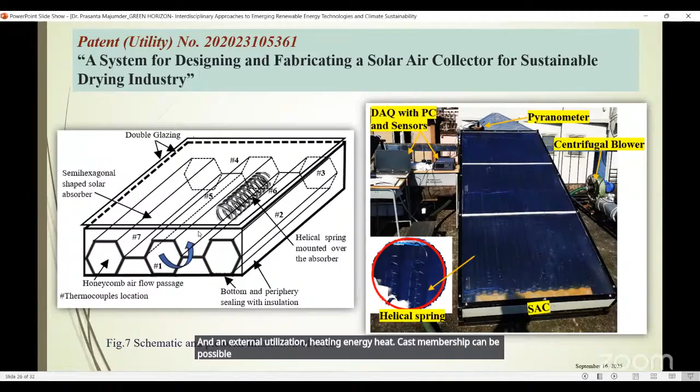Now we have to perform the performance evaluation of this solar thermal system, applying the concept of re-engineering. That means after the fabrication of this system, we have to evaluate the performance, and if any modification is required, it should be done in the further fabrication or further research.

First, the incident solar energy input in the solar air collector is estimated using equation 30. The usable heat energy gained in the solar air heater by means of air heating can be estimated by equation number 31, where I is the solar intensity.

This we can find out by using the pyranometer, or you can estimate it using various sites like Solcast for solar data. It is readily available for every location worldwide. The area of the solar collector has already been calculated and estimated in the earlier section.

Then alpha and tau. Alpha is the absorptivity and tau is the transmissivity of the top glazing. The absorptivity should be high so that solar energy can be absorbed in the solar absorber. T out is the outlet temperature from the solar air collector, meaning the temperature of the outlet air, and T ambient is the surrounding temperature.

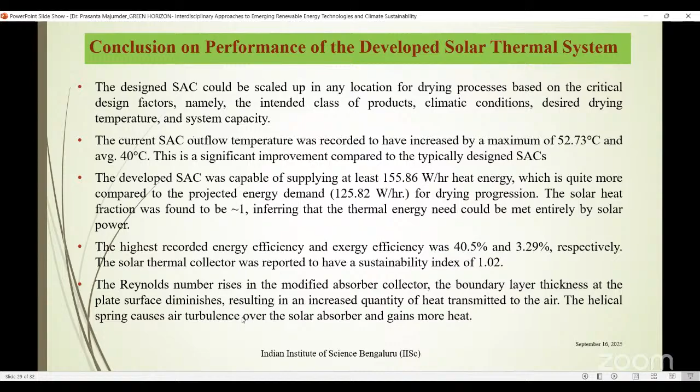Then, the dual mode fluidized bed drying system. This is another invention, a solar energy based drying system. The modified fluidized bed drying system is advantageous with both the effect of direct solar heating and the cone angle.

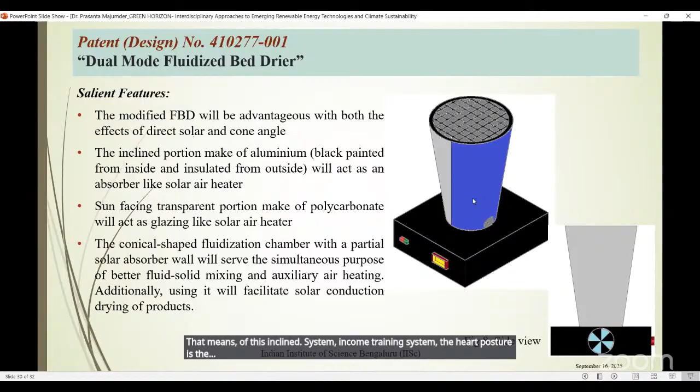The design of this drying chamber is modified and made in an inclined position. The inclined portion is made of aluminum, black painted from inside and insulated from outside, acting as an absorber of solar energy. In this inclined drying system, half the portion is a metallic sheet which is black painted from inside, which gets solar radiation from inside and acts like a solar absorber.

The other half portion, facing towards the sun, is a polycarbonate sheet which acts as a glazing of the solar air collector. So this metallic portion gets heating from the solar energy, and this is also transmitted to the transparent polycarbonate portion.

From the side view, there is an air suction fan, and air will be sucked from the ambient and pass through this chamber. While the air passes through the chamber, it gets heated when in contact with this heated absorber, which gets heated by taking solar energy through the transparent polycarbonate sheet. This conical shaped fluidized chamber with a partial solar absorber wall serves the simultaneous purpose of better fluid-solid mixing and auxiliary air heating system.

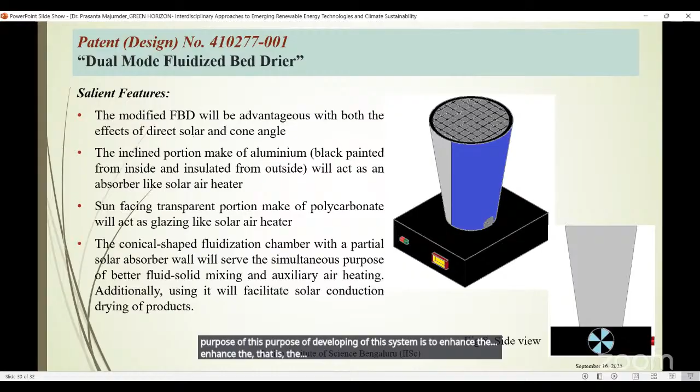The purpose of developing this system is to enhance the fluidization efficiency of the system. To enhance the fluidization quality, we modified this column, and also introduced auxiliary air heating by changing the shape of the chamber, distinguishing two portions: one is the metallic absorber, and the other is the polycarbonate crystal, that is, the transparent polycarbonate sheet.

So, as a summary, these are the viable approaches for the sustainable energy system: substituting finite energy sources, that is conventional fossil fuel. Our target should be to substitute conventional fossil fuel by replacing it with renewable energy sources, whatever is available, accessible, and at negligible cost, and synergistic hybrid energy sources like solar wind, solar biomass, and solar geothermal.

Nowadays, hybrid systems are getting more attention because renewable energy sources are uncertain in many areas. So sometimes if solar is insufficient, we can use energy from the wind.

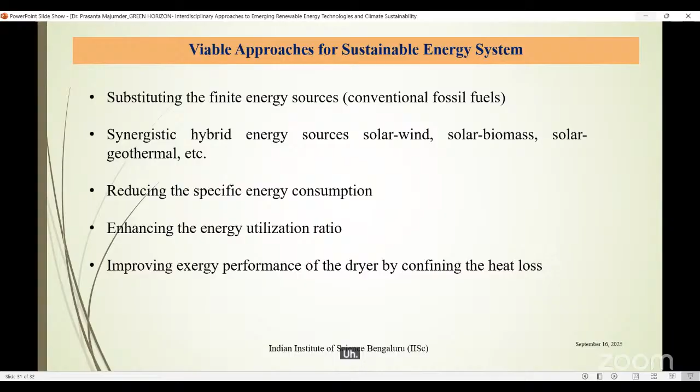And then reducing the specific energy consumption. Energy consumption can be reduced, because earlier in this patent, that is the modification of the fluidization chamber. So by modifying the fluidization chamber, the energy consumption would be reduced, because the fluidization quality was increased. So because of increasing the fluidization quality, less energy was required for fluidizing the product.

And enhancing the energy utilization ratio, that means the maximum utilization of energy by reducing the wastage, by circulating this hot air or hot fluid, whatever is there. So by circulating the hot air or hot fluid, we can recirculate the waste heat, and we can reuse it in further process, so that the maximum utilization of energy can be achieved.

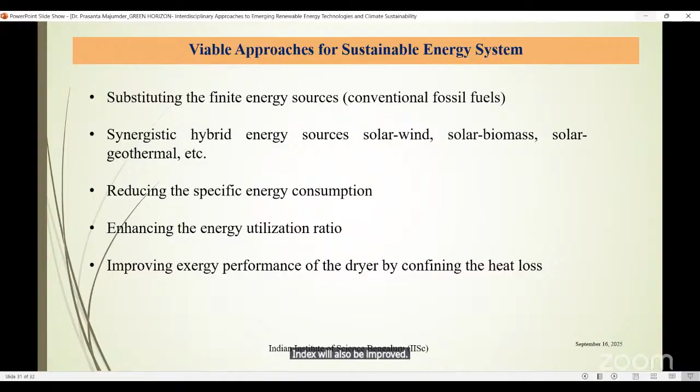Then improving the exergy performance of the drying system by confining the heat loss. Heat loss can be reduced by proper insulation and also a circular strategy, reducing the heat loss from the sidewall and the exit of the system, so that the exergy performance would be increased, so the sustainability index will also be improved. Thank you.